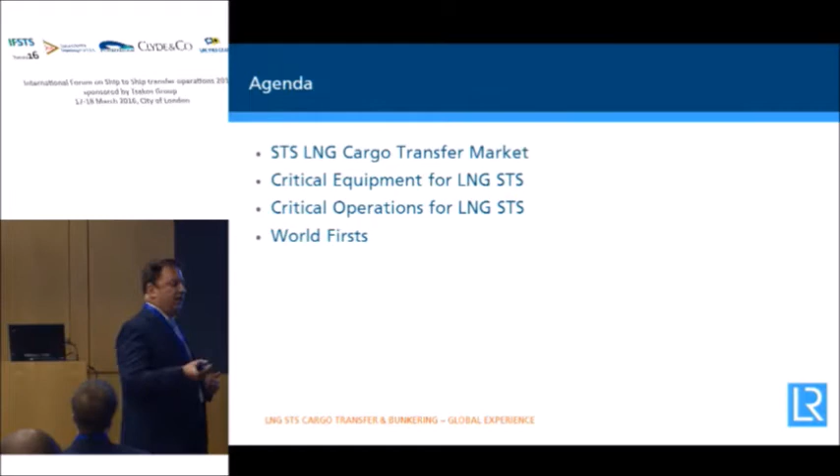What do we have? Three typical operations happen worldwide nowadays. The first one involves loading cargo, floating LNG - the Shell Prelude will come to the market very soon. And here I've got a GBS, which is a concrete gravity-based platform. There is one in the world, Adriatico in the Adriatic Sea, and it actually offloads quite a lot of LNG daily.

The regulatory issues and aspects involved - I'm coming inside so I can keep you all awake - it's very simple. When you're actually offshore, class applies, flag applies, and the regulatory legal regime of the country of operation applies.

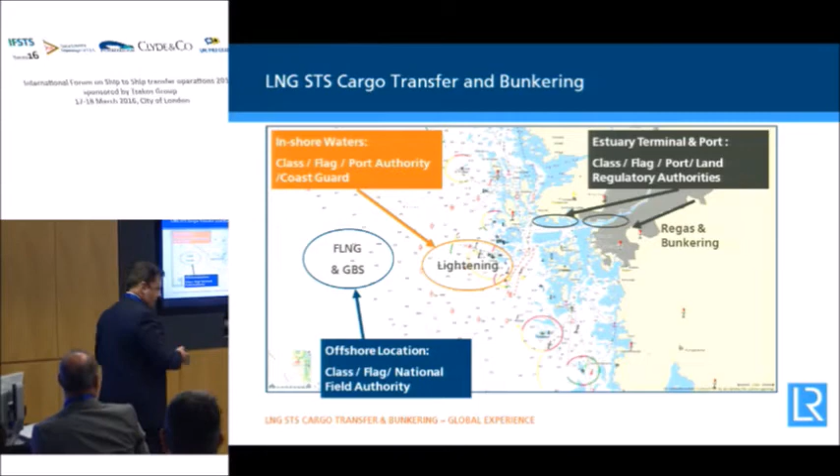If we now move to lightering, you probably have quite a lot of lightering of LNG taking place - well, it's once a week in reality. Ports are complaining because it seems to be a bit unregulated and very close to port waters. Why lightering of LNG? For the last 5 years we have the impact of very large ships, Q-Maxes and Q-Flexes, entering the market. Most of those cannot go into certain ports or cannot go into estuaries.

On the other hand, we have two activities: regasification requires a lot of LNG, and we also have bunkering activities. That's where the lightering takes place, and there's quite a lot of this nowadays. Class and flag requirements, and as I said earlier, Coast Guard requirements play a very important role in what I'm allowed to do and not to do.

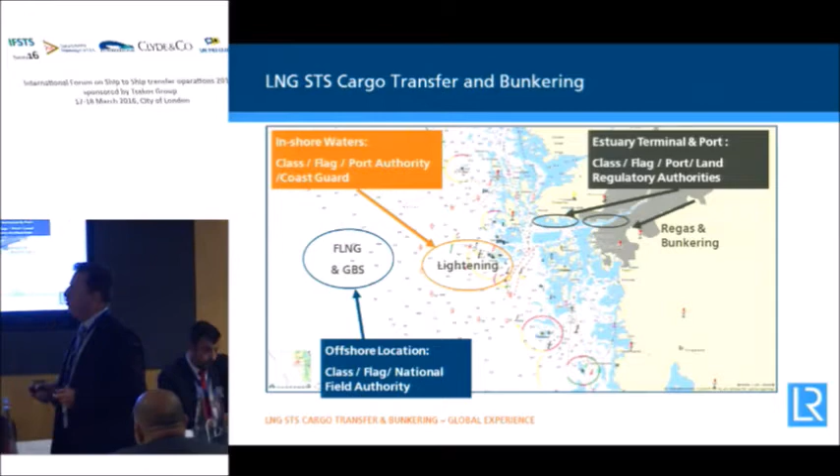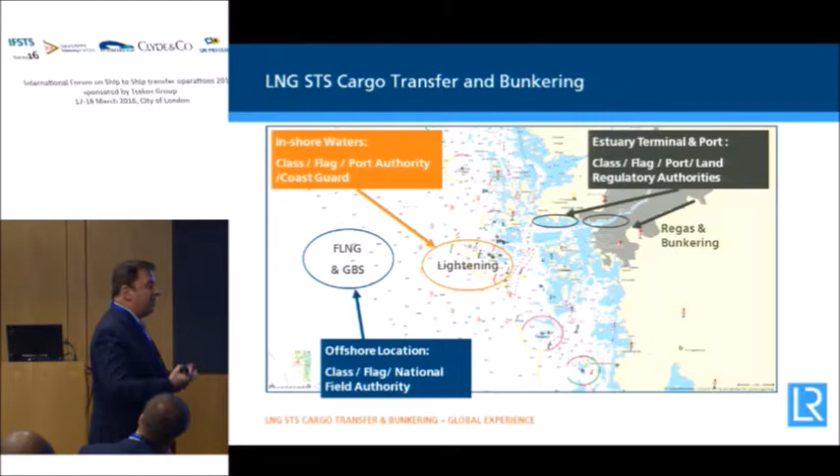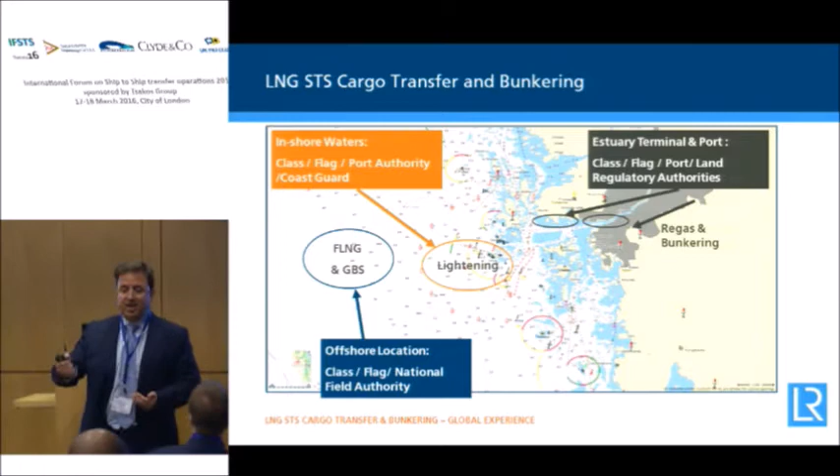Last but not least, something which really made the evolution of ship-to-ship LNG transfer: regasification activities and bunkering. This happens in terminals, in estuaries majority of it, supporting power operations near shore, or supporting literally upgrading the gas output into a city grid in certain parts of the world. These operations are not only related to class and flag activities, but very much related to port authority allowances because they happen in ports.

Let's make a commercial link between the types of people, the types of ships, and the output I want. In reality, if I want to have a regasification vessel installed, I can't do it if I require an output less than 500 million scf a day, which is related to something about 80,000 cubic meters a day. It doesn't pay out. If I've got an FSO, a floating storage unit for LNG, it's a useful item to have in certain, especially large, bunkering ports.

I can't do anything if I'm not prepared to use about 1 billion scf a day. And then we move into the really big beast, which is the FLNG.

3 years ago, it would have been pointless to have an FLNG if you're not able to export 1.5 million tons per annum, given the gas prices at the time. Today, you're looking at 2 to 3 minimum. 3.2 million tons per annum is what Prelude exports.

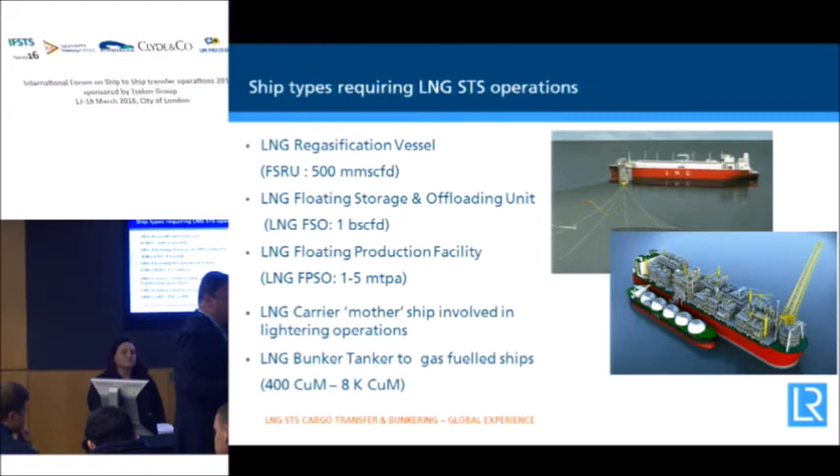Then we have the mother carrier to lightering operations, and lastly bunkering, because bunkering evolves continuously. Currently small coastal ferries use 400 to 600 cubic meters, but we now have vessels involved up to 1,000 cubic meters, with a combination floating crane up to 8,000 cubic meters, now actually in construction.

Just a bit of a round back, I used this photograph of the FSRU to show you how much safety is related typically to ship operations. In addition to normal LNG carrier safety, if you add a regasification system forward, you'd see that it's quite substantial. Then you have berthing loads to address, cryogenic impact to address, vapor return to address, emergency disconnection system to address.

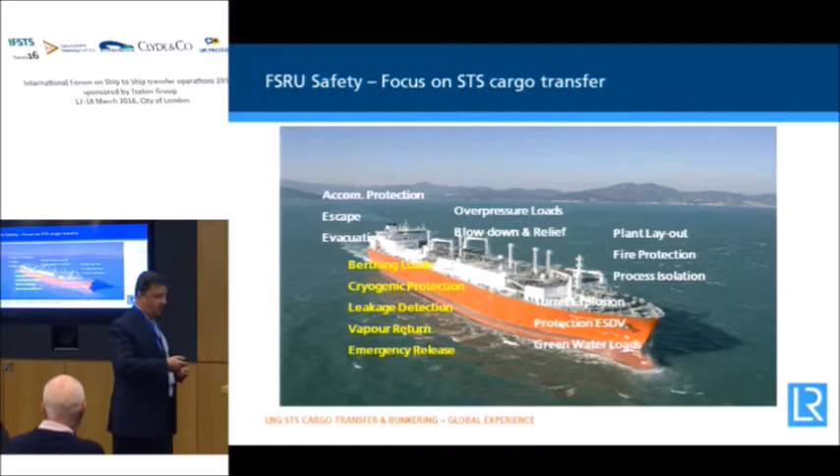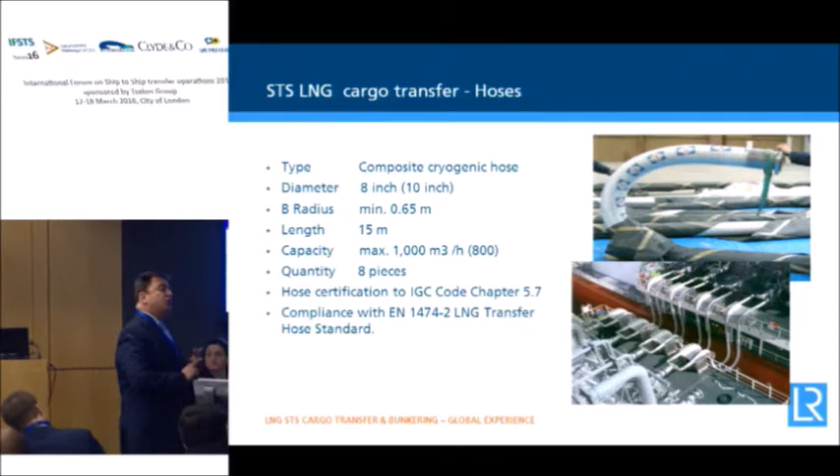We're using 8-inch hoses. They're about 25 layers of material supported by a spiral metal construction. They're very flexible, they're light. Why 8 inches? So we can couple them to the 16-inch manifold, standard LNG ship manifolds, to operate. So when we export, as you'll see in the next photograph, we export with 3 manifolds on liquid and 1 manifold of vapor return. The hoses are certified and designed according to a design standard based on a European standard, 1474.

However, that is if you're looking to export something like 6,000 cubic meters per hour in liquid transfer. If you're really looking to have far, far greater volumes, you can't do it with hoses. You need literally a fixed arm, very typical to what you have at LNG terminals.

Now, when I was starting with hoses, the big boys in this area, the FMCs of this world, went to IMO and raised a notion about it: why were we allowing ships to transfer with hoses without having an appropriate PERC system, an emergency release system, when that's a requirement for arms at terminals? The industry at the time was defenseless, simply because it's not that we did not want the system on board, there wasn't any. None had been designed. Nowadays there is one, you'll see it later on.

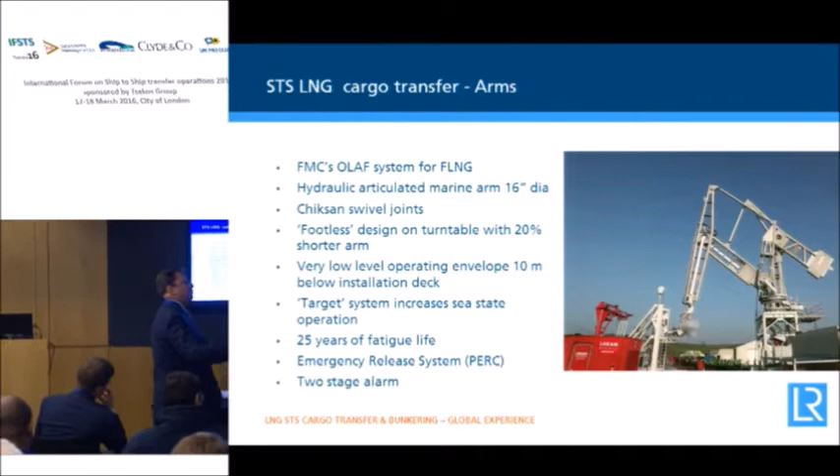This particular design, which is used on the Prelude, is much simplified and marinized for marine application. It's a lighter arm, and most importantly, because of the difference in draft between the huge Prelude and the coming LNG carriers to float, it can operate 10 to 15 meters radius below the main deck, which makes operations really important for various drafts. This type of arm is very much designed outside the ship envelope, designed for something like 25 years of continuous fatigue life, without dry docking, without changing. So something to think about when you're looking at offshore operations.

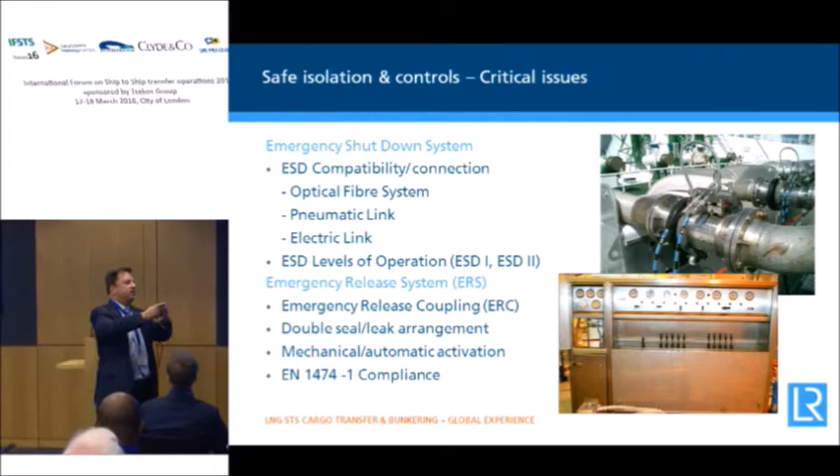I talked about safe and isolation control, and that's the system you see here. The system on the top picture is actually the emergency release on the hoses, specifically designed to operate for hoses. The two ships, however, have to be able to initiate two isolation modes: ESD1, which is basically stop your cargo, and ESD2, which is actually release. The two modes, in order to address marine motions and operations, are linked via a pneumatic or electrical link between the two ships. If that link is interrupted, it might go to ESD1 mode. If the operations of the ships are wide enough, then I initiate manually or automatically separation of the systems.

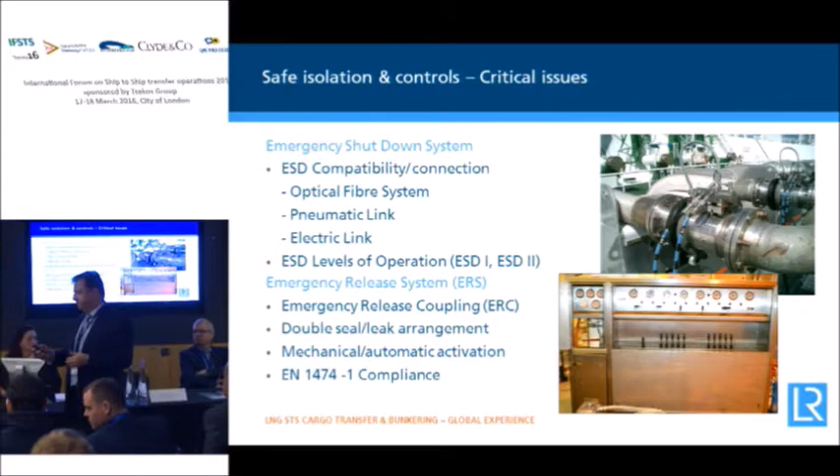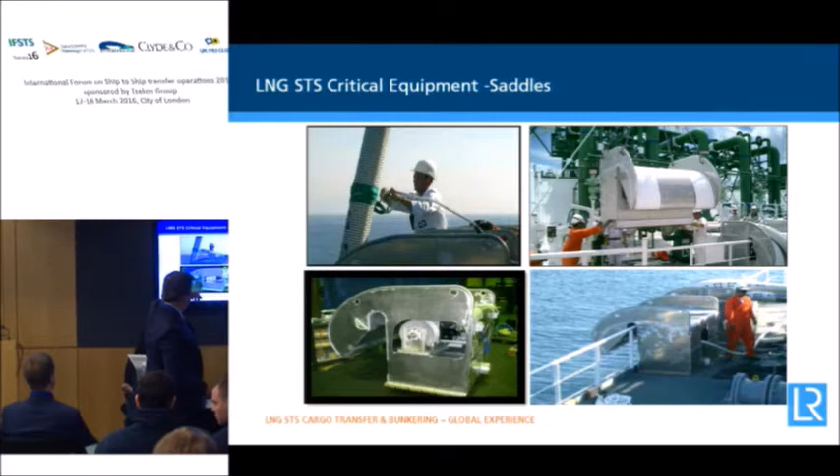A little bit on the critical equipment, saddles, which you'd obviously use for oil cargo. Here it's a bit different because I want to do two things. First, I want to avoid the kicking of hoses and line them up to the manifolds. Second, which is the clever mechanism behind it, I tie the top of the hose, so when the ERC separation takes place, the hose doesn't drop and doesn't create any impact on the side that could be an ignition source. It drops very, very slowly until it separates.

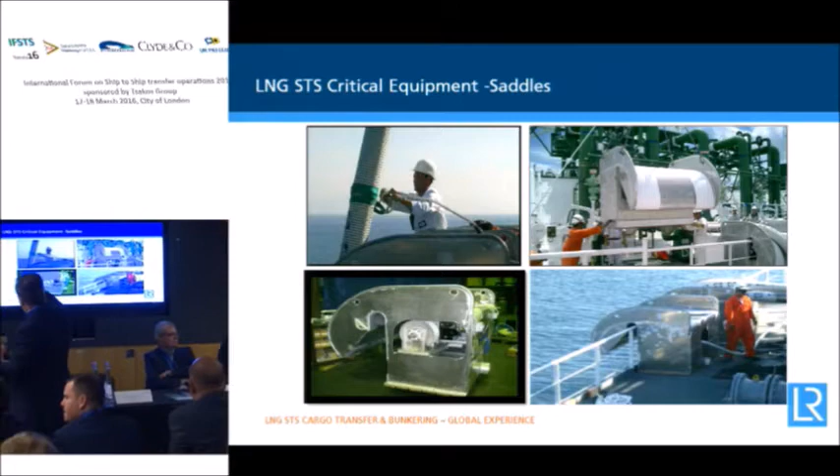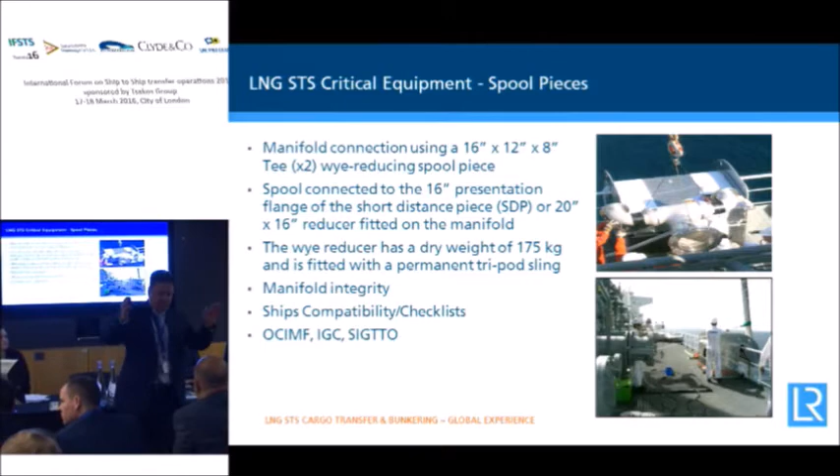Again, the manifold issue, how to address it? I address it with spools, specifically designed. Very important issue, which I've forgotten to ask, but you've got to understand is the compatibility between two ships. We never do LNG ship-to-ship transfer without pre-compatibility checks, which take place early in the operation phase. The contract doesn't proceed with the charterer unless compatibility checks have actually taken place. Once checked, and we know that we can line up the manifold and the systems are compatible, then the contract takes place. So that's something very important to understand.

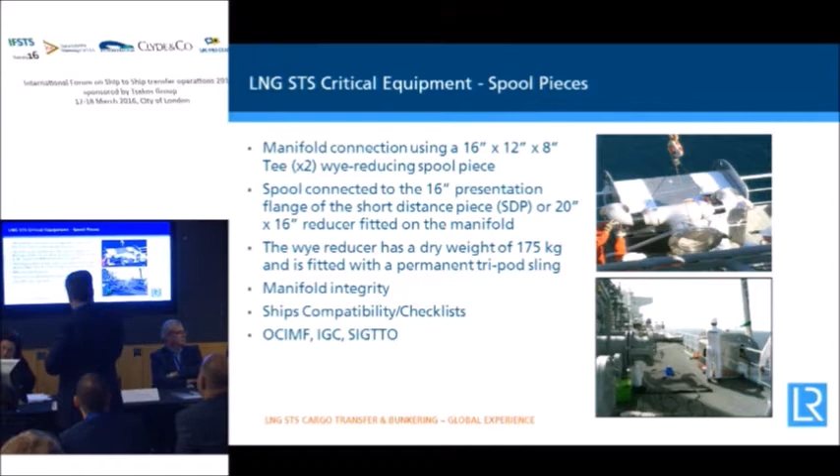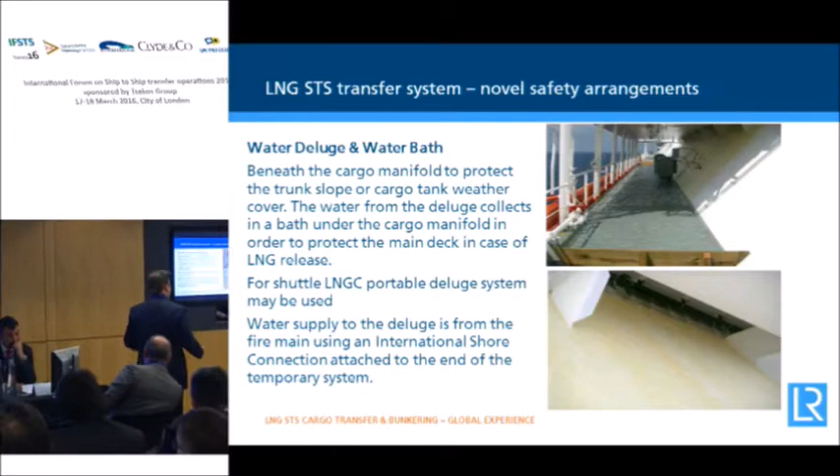As in terminals, here on ships we have a continuous water curtain on the side of the vessel to protect it from potential cryogenic impact. It's a nice way to do it, because now the mothership, the FSRU in our case, has the ability to provide a portable system to the LNG ship to protect the side of that ship as well.

I've spoken a lot about cargo transfer, but it's very important to understand that a lot of investment and technology input is now going into evaluating systems for bunkering operations. Not so much coastal water bunkering, but deep water bunkering, which will inevitably arrive. These systems are very lightweight. They'll use a combination of hoses, a 10-inch hose and a 6-inch hose, which seems to be the preferable size currently, with an articulated arm or supported by a crane.

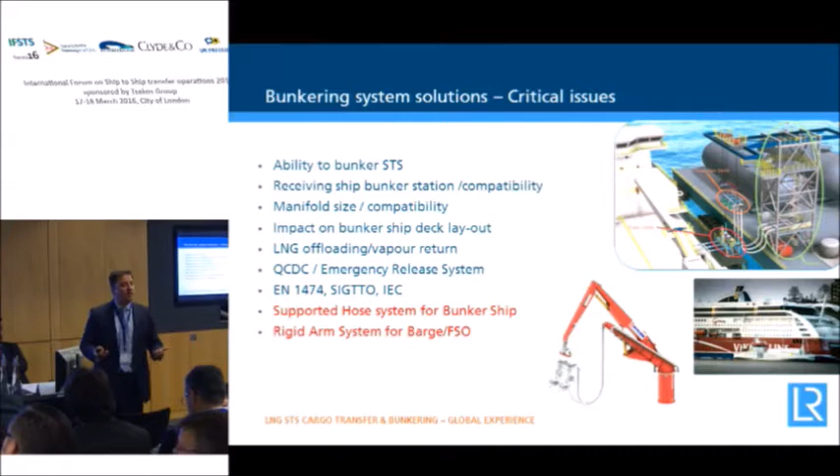I put the top drawing there to show you something else. This is a design we're currently certified for in the Port of Singapore. This is literally an offshore floating platform that they will operate in addition to the normal bunkering facility in Singapore, to enable larger ships to come and get bunkered with quite a lot of LNG as fuel.

We discussed hoses, we discussed vapor return, and the port mentioned the environmental issue. In LNG, it's not just the environmental issue - that's the least of our worry. In LNG, I have to have vapor return. There is no other way around it to operate the integrity of my storage system.

So, when I'm receiving liquid from another vessel, I'm putting it into a relatively warmer tank. Even 2 or 3 degrees down from 163 makes a difference. I use a lot of energy in these lines - friction, pumps - so the difference in temperature is substantial. That produces a lot of vapor. The ship cannot operate under these pressure conditions. We'd have to open valves in port. This is totally not allowed. And the integrity of the storage system cannot be maintained.

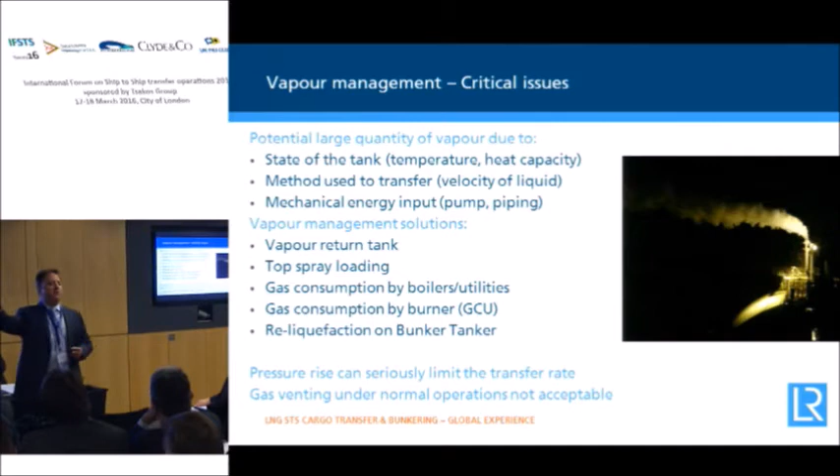To give you an idea how important vapor return is to a given ship, and how important it is to use other systems, either re-liquefaction or the boilers - when I'm exporting about 6,000 to 8,000 cubic meters an hour, if my pressure goes up by about 2 bar, I have to drop 1,000 cubic meters at 2 bar pressure. You can imagine how much this elongates the ship-to-ship action.

Maneuverability - very important for a variety of reasons. Some of my colleagues earlier touched on crew performance, piloting performance. But for LNG, there are other important issues, many of them legal issues. Let me give an example. LNG ships have a high windage area compared to most other ships around. It means that if I'm in an estuary, or in a critical turning corner under high winds, I have to go at higher speed. If I go lower, I've got a serious problem of grounding.

Now, some ports, some administrations, some governments, some of these facilities have been regulated for very low speeds. So immediately, I need real-time maneuverability simulation analysis to show these bodies how it's going to be done safely. Because otherwise, you cannot show them by words, or by any other risk assessment - it's not visible. So I use this to map the whole passage of the ship, including the arrival of that ship at the port, including the requirements, which is very important for the port authority.

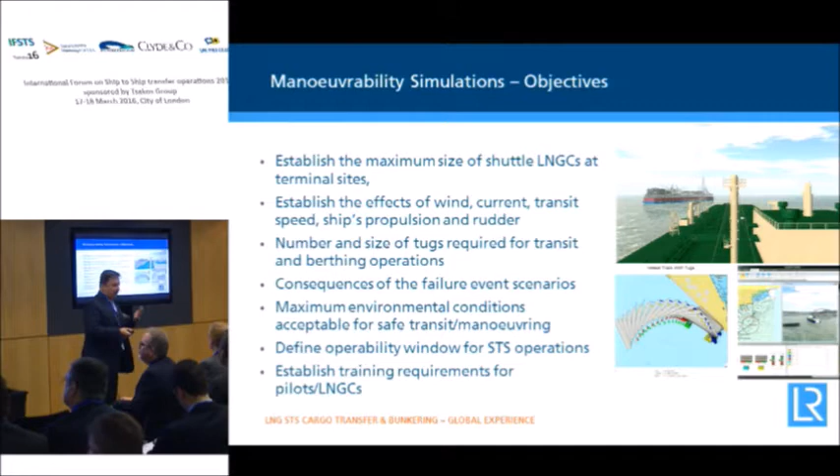It's very important also for the commercial users and the port authority. You raise the requirements for the number of tugs needed for these types of operations to do the safe maneuver. And we plan it according to having n-1 number of tugs. During the maneuver, we take one of the critical tugs out to see whether the maneuver is actually safe or not.

Last, but very important and very different when it comes to an LNG membrane tanker, I have the issue of sloshing. LNG ships, like any other cargo vessel, are designed to be either 95% full or more, so laden, or at ballast, 10% and less. Now, in this intermediate stage, when I have, because of ship-to-ship operations, various levels of liquid within the tanks, under certain conditions of wind and rolling angle, I have a serious problem of loss, a serious integrity issue for the containment of the ship.

So all our operations, especially the near-shore operations where we're exposed to the environment, require risk assessment to address first of all the sloshing issues within the tank, and then the local environment, and most important, the ability for that vessel to stay safe within the sloshing range for a certain time, in order to either take off and go to a safe anchorage, or operate the loading in such a way so I can eliminate this space as quickly as possible.

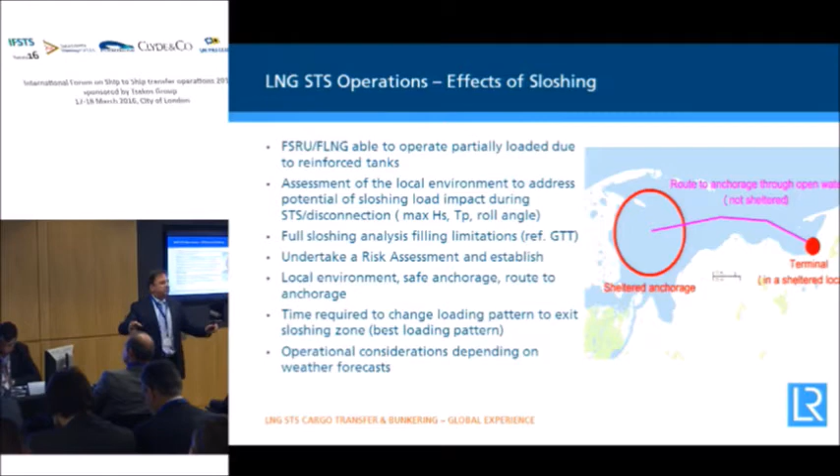There's a lot of risk assessment work that goes into ship-to-ship LNG operations. Sometimes I don't address them directly because most of the people in the LNG industry are fully aware of it. But let me give you an example of the risk assessment work that actually took place to make reality the first full cargo offshore transfer between two ships.

The ships were 138,000 cubic meters, DSME made. You can see that we started with a failure mode and effects analysis of the offloading system. We went to a RAM study for the critical spares, even before the ships were considered for the operation. Then we went to numerous hazard studies of the ship-to-ship transfer system. We went to dry HAZOPs with a number of spools to find out what's best.

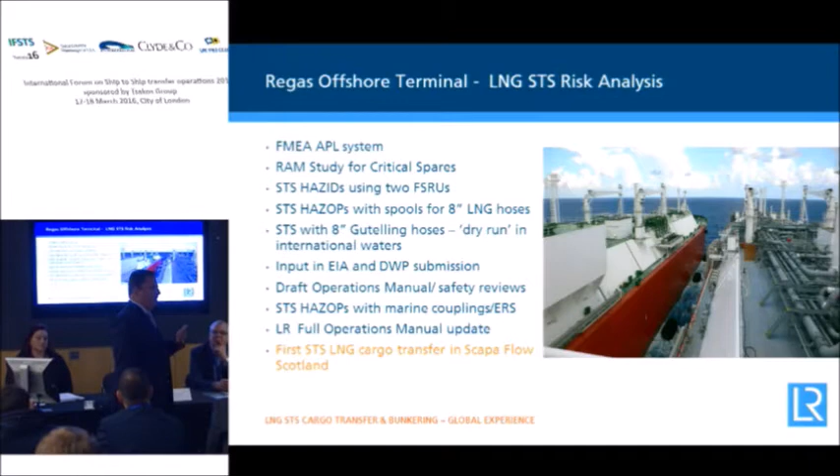And then we go obviously to wet HAZOPs with very small volumes to see what's going to go wrong or not. And then we start thinking of the legal issues, to do the environmental impact assessment, to do the deep water application to the American port, to see how this will apply. It is not a straightforward sort of work. It takes time, it takes experience, which you actually build up working closely with the operator. As I said before, I was fortunate, we saw the photograph earlier on, to be on top of the first full cargo transfer that could take place in the Scapa Flow in Scotland. Why? Because it's very benign there, that's why, at the time.

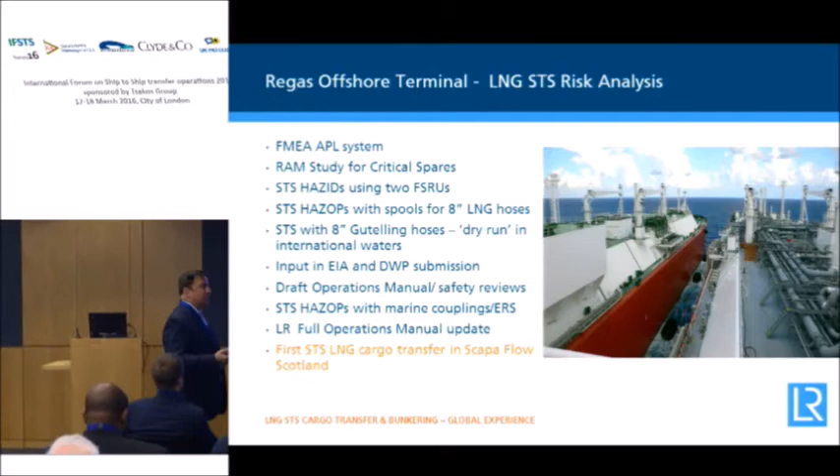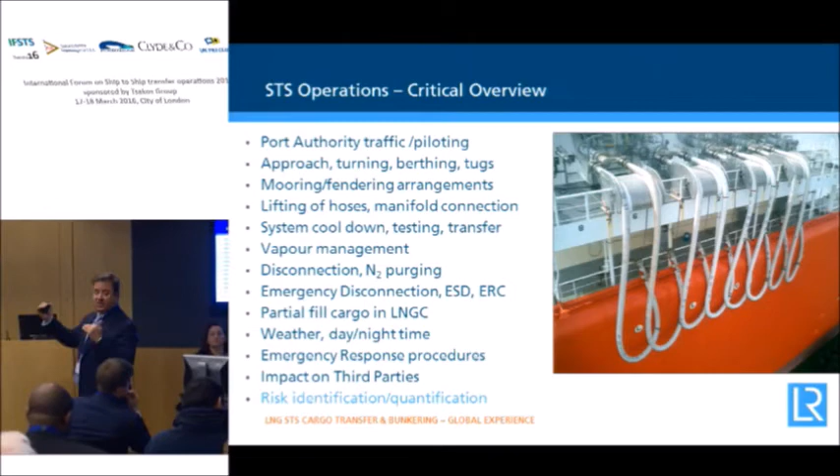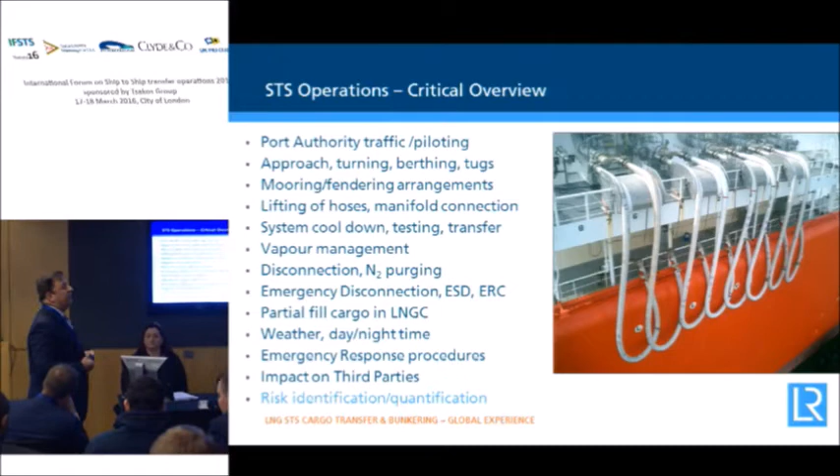And then obviously we finish with very important issues, the emergency response and the third party impact, because this is also part of the insurers' and legal requirements of the country of operation. All of this takes place with risk identification techniques.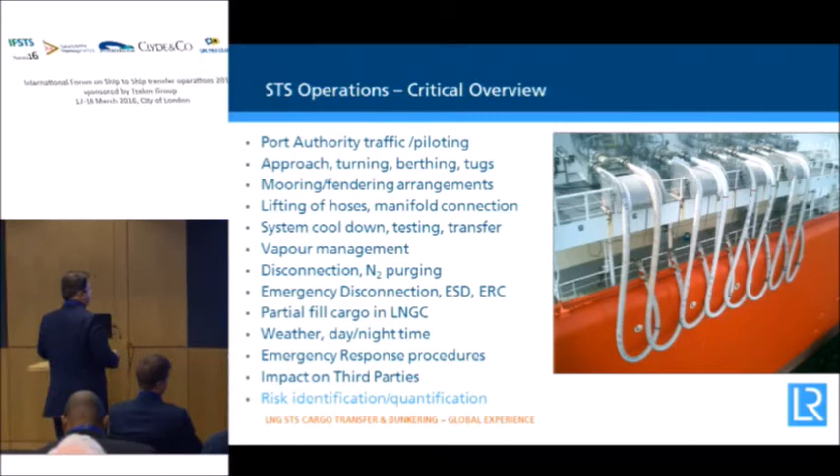Okay, I'm going a bit fast, but we don't want to use up our coffee time. Yes, of course. So that's the last one, nothing to worry about. But it's important to look at the track record.

So there is a lot of things to come, and most important, none of them will operate without safety and integrity in ship-to-ship operations. Thank you very much.